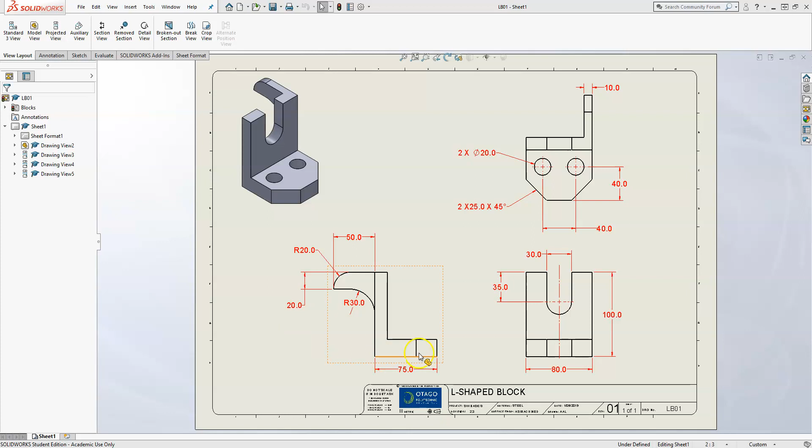Hello and welcome to this tutorial on this L-shaped block that we are creating. So let's go ahead and start a part.

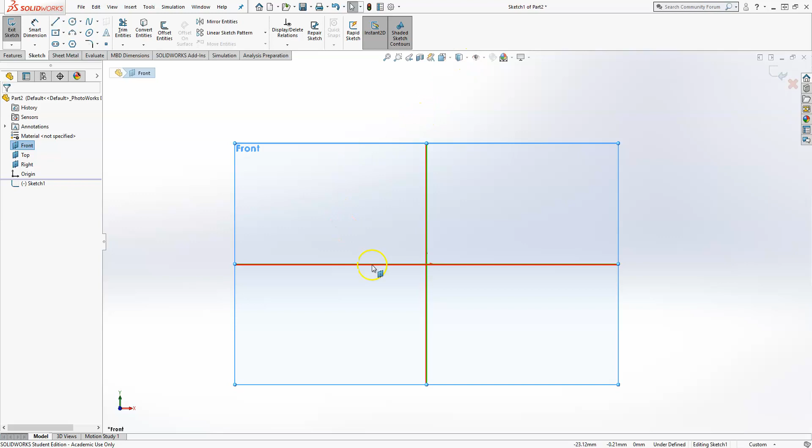We'll start from scratch again, just so we can look at a few different techniques. The first thing I want to do is sketch that L on the front plane. I'm normal to it right now, and I can turn off those planes.

Then I'm going to choose the line and make sure I start my point of the line, my first click, right on the origin. You'll need that little yellow box with the little circular symbol in it. And we'll just go up, over, clicking at each end point of the line.

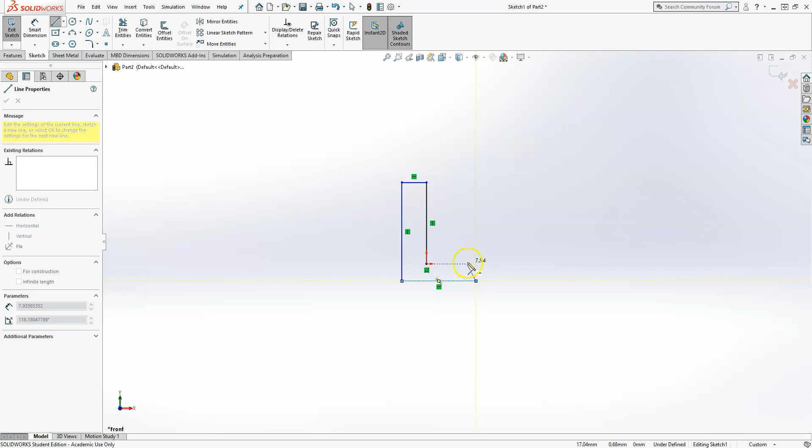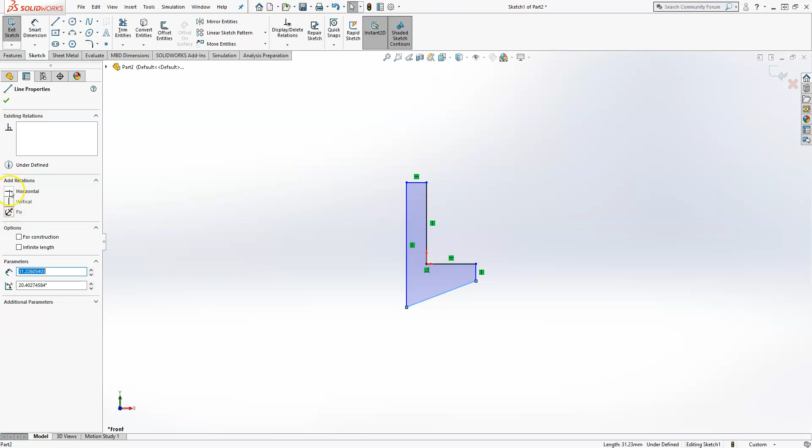You'll notice when I get close to becoming horizontal from that point, it gives me a little indicator with that dotted line. That just helps me make sure I have all of my horizontal and vertical relationships for each line. So if one of your lines is not horizontal or vertical, you can click on that line, and then on the left here, you'll choose either horizontal or vertical.

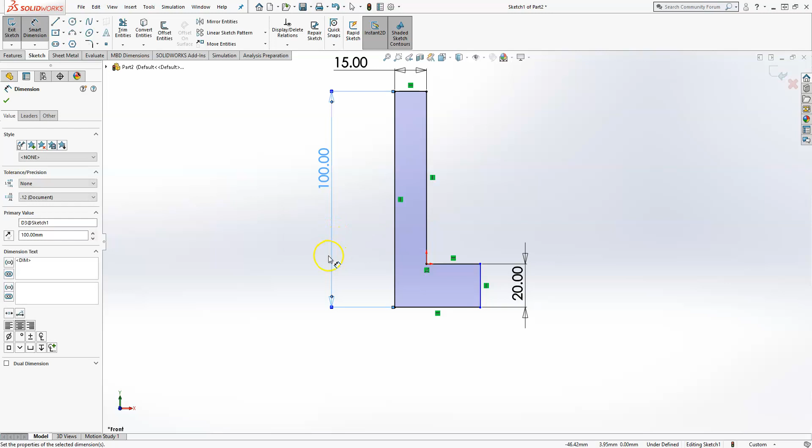Now we go up to the Smart Dimension and we dimension our part. So this one is 20. This one is 15. This is 100. And this one is 75. So that looks pretty good.

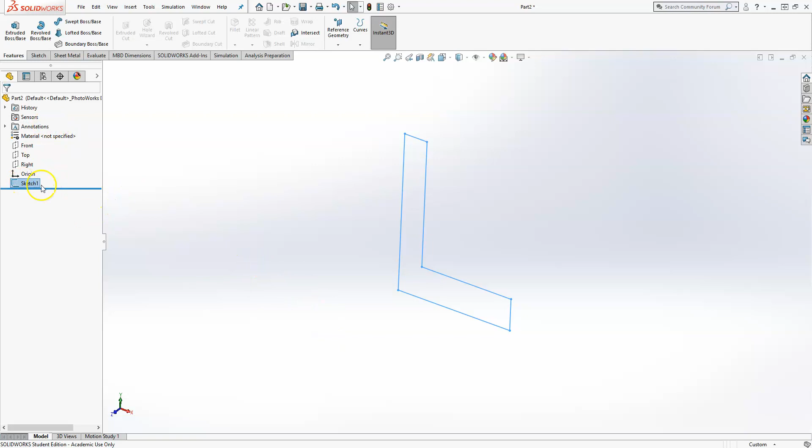So then, top right, we click on the sketch. Now you can rotate it using the center mouse button or the arrow keys. Make sure your sketch is selected, and then go to Extruded Boss.

Since we're picking the origin to be in the center, we're going to extrude from the mid plane, and the overall width of the part is 80. Now if we look at our planes again, we have that right in the middle, so we will use that here in a minute.

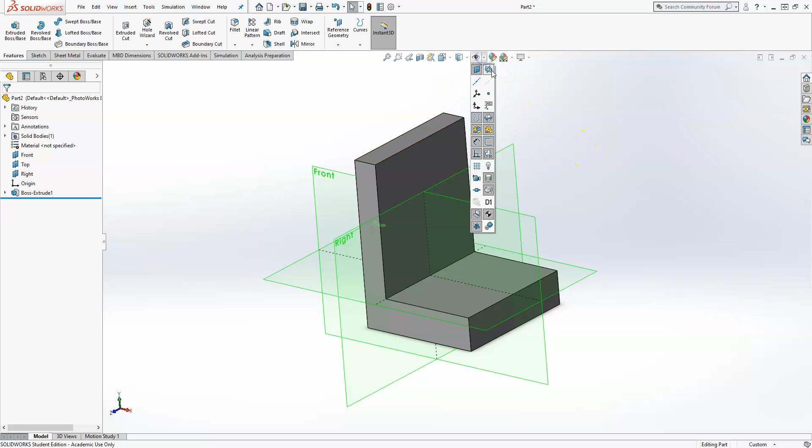We'll turn our planes back off, and now we'll choose this face to sketch on. So we choose sketch, and to get to normal view here, you can hit the space bar to get the orientation window, and then this normal button will bring us straight into the middle.

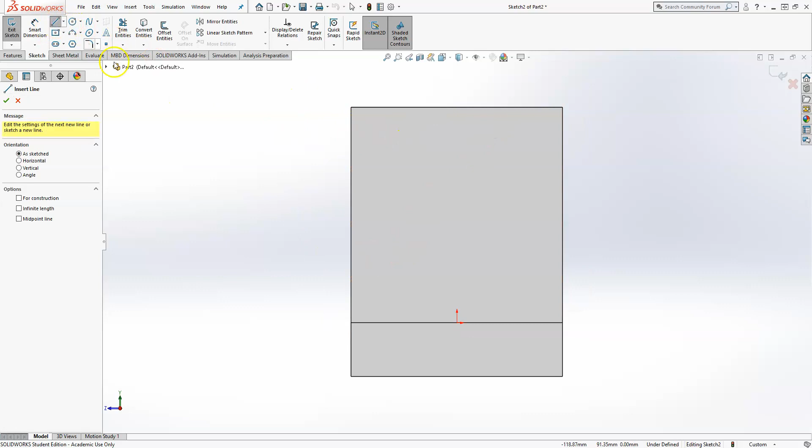Now I click a line, and I start at the top edge, come down. I'm in the line command, but if I bring my cursor to the end point of that first line, I can get an arc. Depending on how you come out of that line will tell you where it goes.

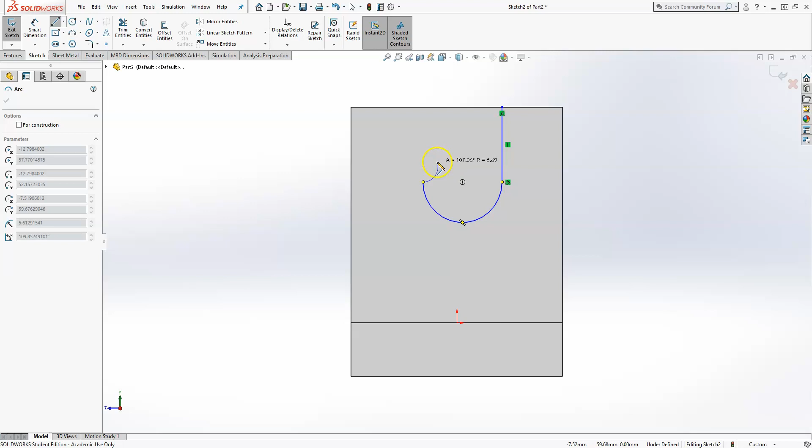Notice that anytime I'm directly horizontal, that dotted line appears. That means this point and this point now are straight across. So we continue with our line, and then we close it. Once we close a sketch, so it's completely enclosed, you'll notice the area becomes shaded, telling us it's a shaded area.

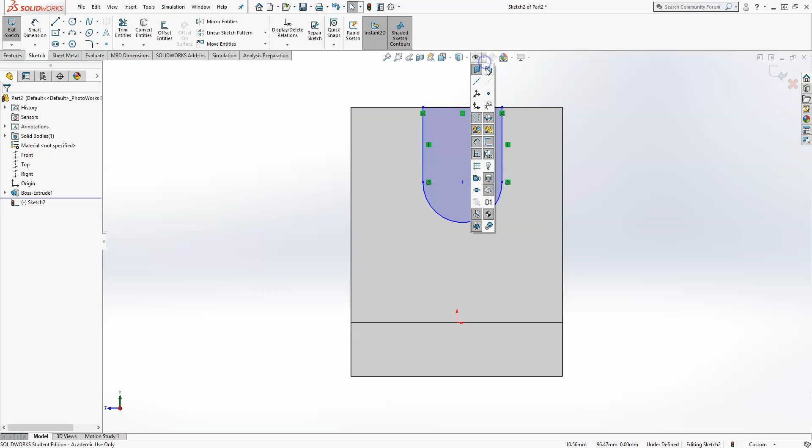So we'll turn on that plane, and we'll put that plane right on that center point of the circle. You can select the plane, select that center point, and hold the control down while you're selecting both of them. That will select both planes. So I click once, then I hold the control, and then I click again to select the plane.

Now both the plane, the right plane, and that point are selected, so now I can make them coincident. If it is coincident, that means it's always on that plane, so it cannot come off that plane. It can grow and shrink, but it cannot come off that plane.

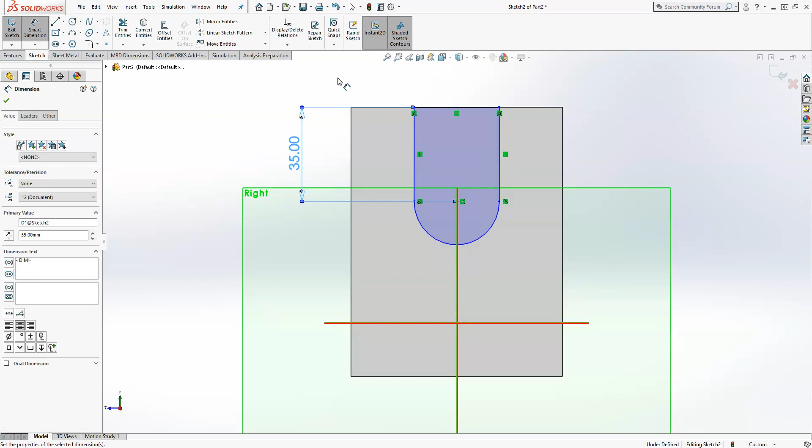Now we'll add the other dimensions, which is this dimension of 35 and this dimension of 30. Then we can close that sketch. So it's selected, and now we're doing an extruded cut. We can extrude through all because we want to go through the entire part. So there's that slot.

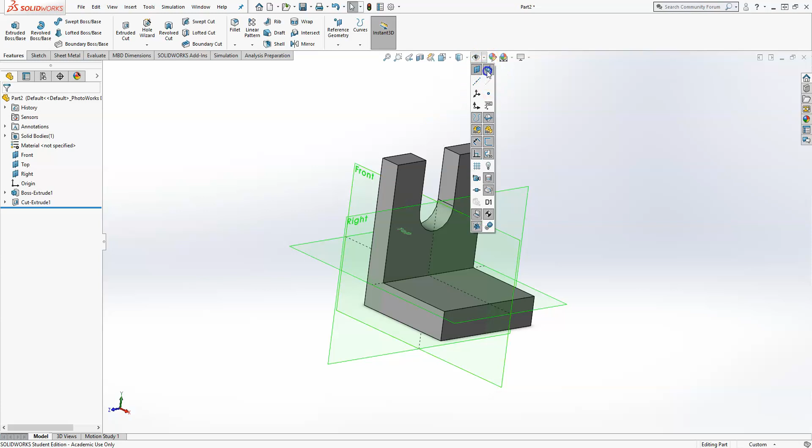So now let's look at the top side. Let's go ahead and click. I'll do two tutorials: I'll do this one where I'm doing everything in a cut, and then I will show a little bit different technique in a different video.

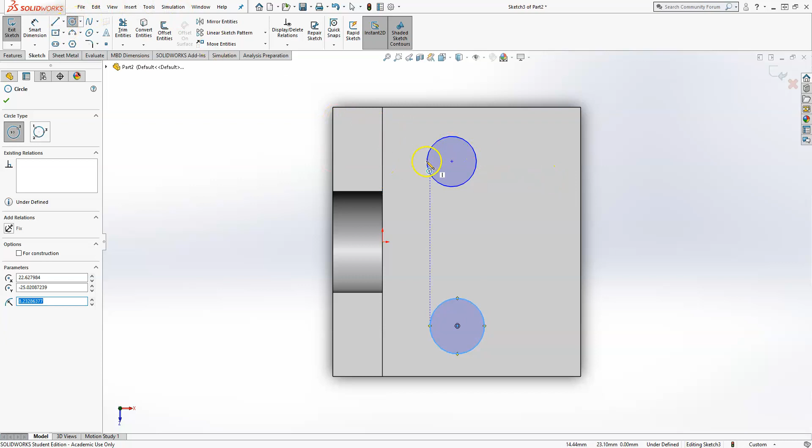So I'm going to draw two circles, clicking once for the center point and then once for the exterior, and then I'll choose a line and create those triangles in the corner.

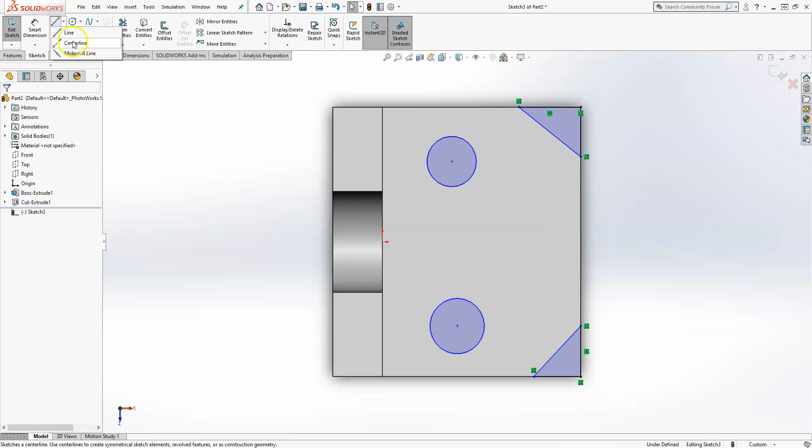And then I'm going to create one more line, called a center line. A center line is there for construction purposes, so you can use it to make things symmetric about this center line.

I'm going to control-select both of the centers of the circles and make them vertical, so their centers are always vertical. Then I select the centers again, clicking one, control-clicking the other, and continue holding control to select the center line. Now I can get this symmetric relationship, so we click symmetric. That means these circles are always vertical and always the same distance from the plane we chose as our symmetry plane, so they're symmetric about this line.

So we will add our dimension. We'll dimension between these, that's 40. And the dimension from this point to this edge is also 40.

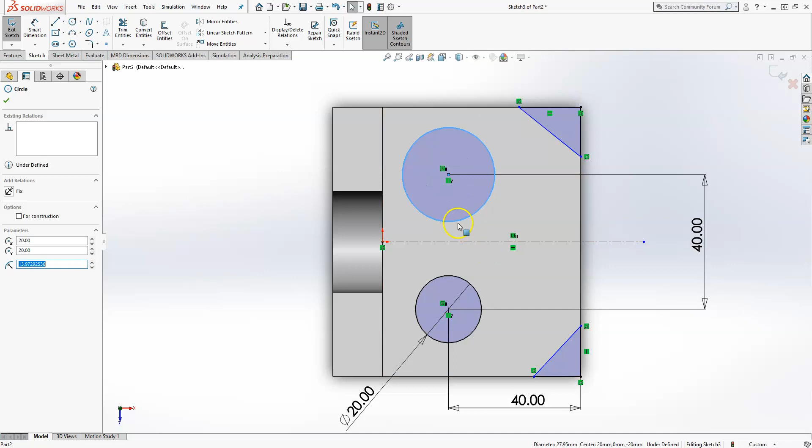The last thing to do is put in the circles' diameter, so that is 20. You notice this one is still blue because we can still change it. By clicking and holding, we can see what is not fully defined. So now we select the exterior, hold control, select the exterior of the other circle, and make them equal. So those are equal circles, and now both are fully defined.

Now we just have to work on our triangles in the corners. We'll do the same thing, selecting all three by holding control when you click on each, and we want to make those angles symmetric about the center plane. The call out is for 25 by 45.

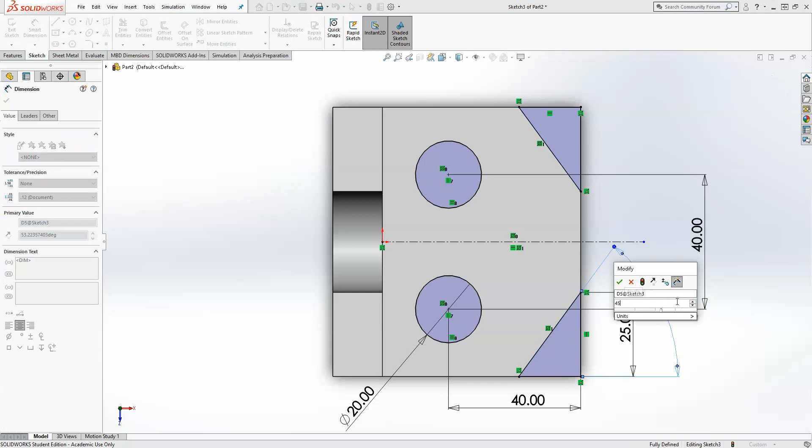So we will dimension this 25. And if we click one line and then the other, that's where we'll get our angle to come. I'll make that 45.

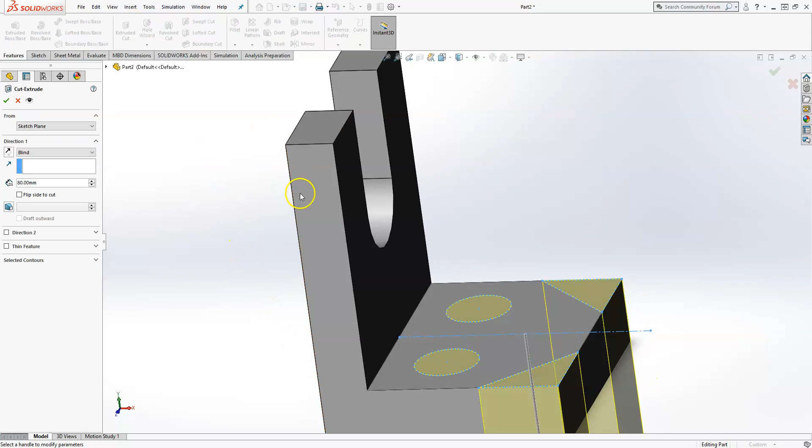So there's our three shapes, and our sketch is now fully defined, so we can close it. Now with our sketch selected, we go extrude cut, rotate it with that center mouse button, and again we'll choose through all, because that will put that cut through everything. So it's looking pretty good now, we've got all those features in there.

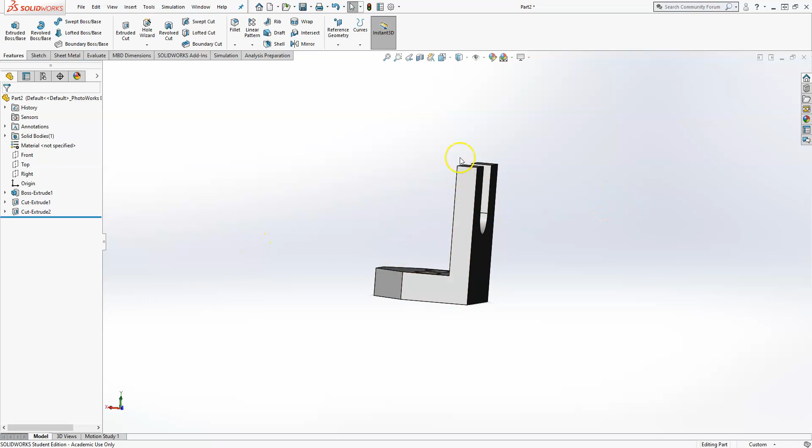This last thing is this little tab on this back corner. So I'm going to choose this face to sketch on. I click on it and go sketch, type the space bar, and go normal to.

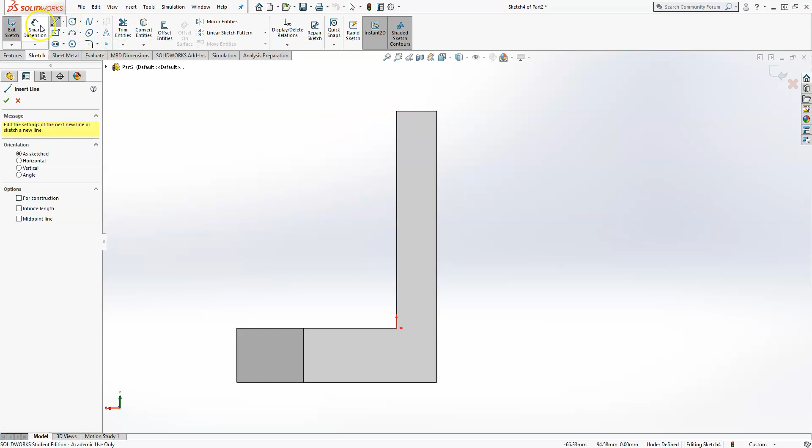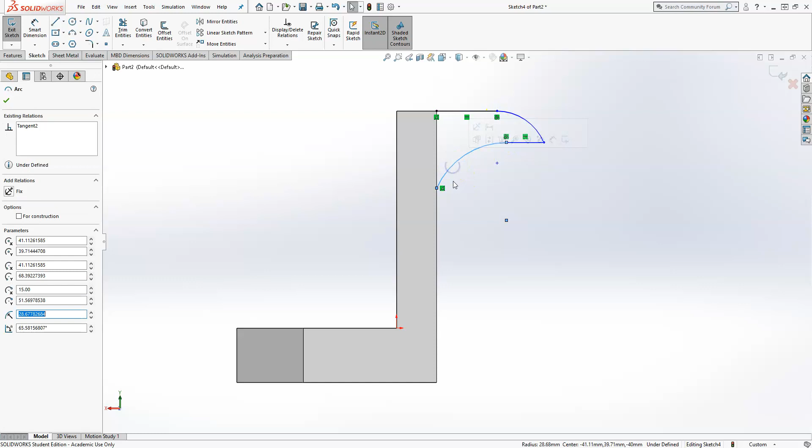Now this is a little bit of a strange shape, but basically I'm going to choose a line, draw a line, then an arc, then a line, and an arc. You'll notice this arc has the tangent symbol, as does this one, but this one needs to be tangent to this. So you select that line, control-select this other line, and we can make it tangent.

The last thing we want to do is always make sure you close your sketches. So you need a line between those starting and end points, and that will create that shaded part in there.

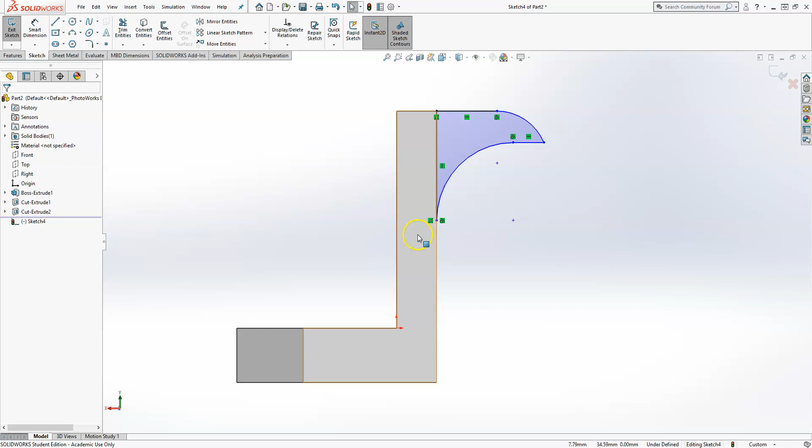Now all we need to do is add some of those dimensions that are on the drawing. We'll dimension this at 20, this at 30, this at 50, and from this line to this line is 20. Once we add that last dimension, you'll notice everything goes into black, and our sketch says fully defined.

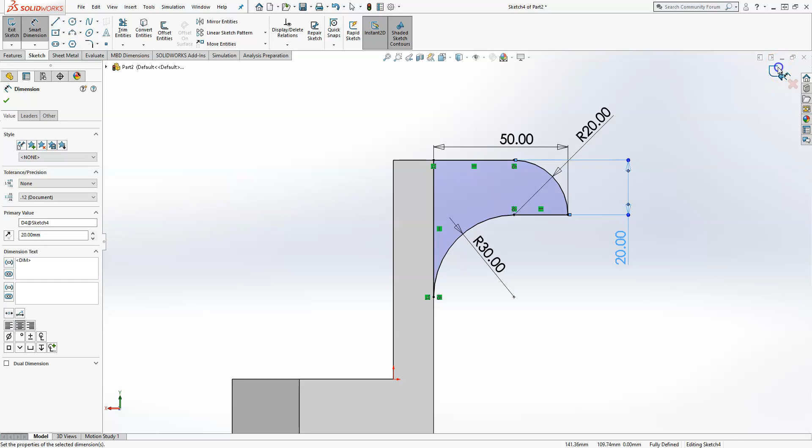So we click OK, and now all we need to do is extruded boss. It's actually extruding the wrong way, so what we can do is, next to blind, click this reverse direction button, and it will switch to extrude the other way.

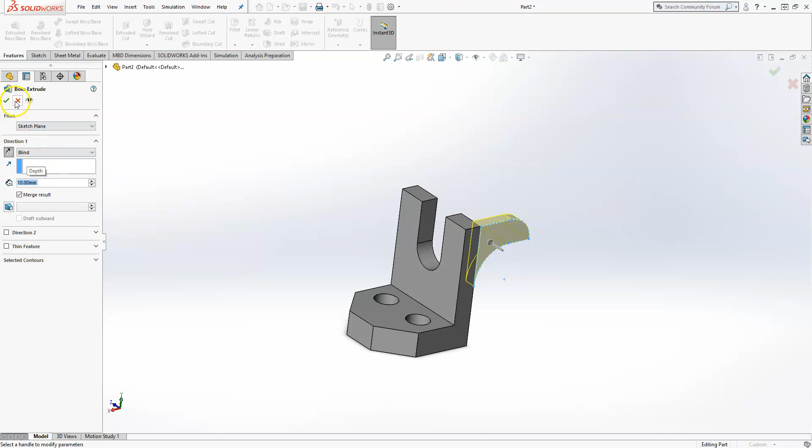The thickness of that part, according to the drawing, is 10. We click OK, and there is our part. If you click spacebar and click on isometric, that will put it in the isometric view. So there is our L block from scratch.